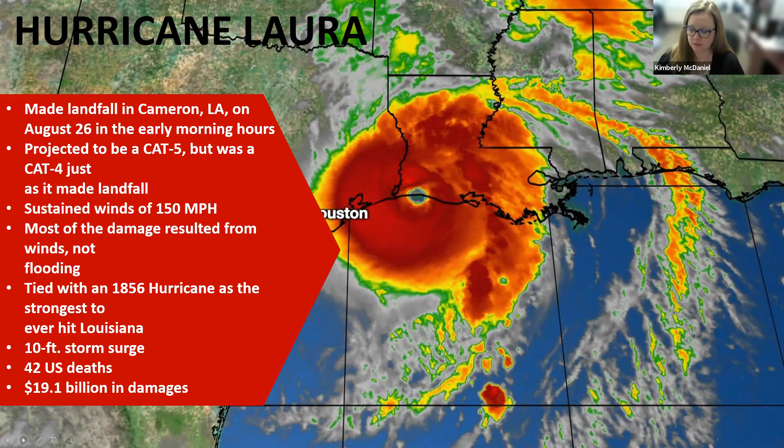We sat here in Baton Rouge watching the damage, watching the news, watching this happen—really not much that we could do. As the hurricane moved through and local officials started to assess damages, the entire parish of Calcasieu Parish and Cameron Parish, you can see on the map, everything in that really dark red, were 100% without power. A big majority of the state did not have power at all, and when you lose power, you lose everything—signals, sewer and water systems, all sorts of things go offline. So the damages were just really, really bad, a lot of it attributed to wind and flying debris.

So they ordered an evacuation prior to the hurricane. People listened, people got out of those areas. We have a strong relationship at Fenstermaker with Calcasieu Parish, we do a lot of work with the parish. On that following Monday, the hurricane had passed through Wednesday night into Thursday morning.

They started assessing damages over the weekend, started to allow people in on that Saturday, although there was a strict curfew in place, to come back and assess their personal damage and situations, but you had to leave before the curfew started. They weren't allowing people to stay in the parish overnight unless you had special permission because of your essential job. That's when they started to realize they had traffic issues, not only getting in and out of the parish, but within the parish as well.

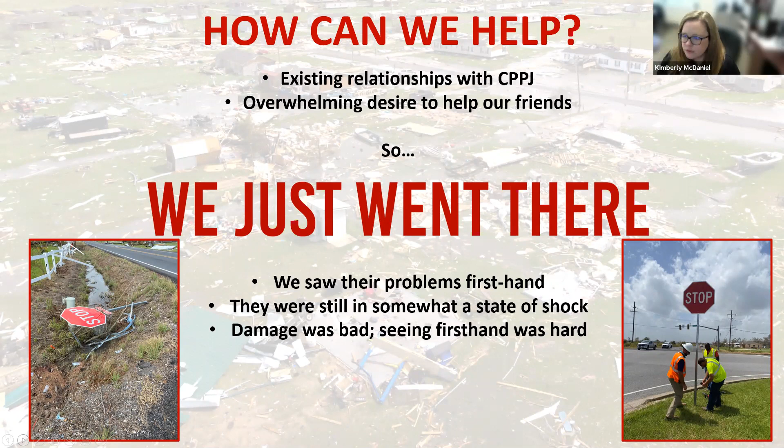We sat and we listened and realized they were still really in pretty much a state of shock. They were having a difficult time even figuring out where to start. So we sat down with them, tried to understand the problems they had. What were their biggest concerns? One of their biggest concerns was crashes.

So we said, okay, but your signals aren't working - have you put stop signs up? And they hadn't. So we said, look, do you have some stop signs? Let's load them up. We loaded them into a truck and rode around with them, helped them put stop signs up at those intersections, and just tried to do what we could - kind of boots on the ground. What can we do to help you?

Then we sat down with them after we did that and really just started to sort through their problems and help them figure out a path to recovery - what do you need to do to move on from here if this is a big concern of yours?

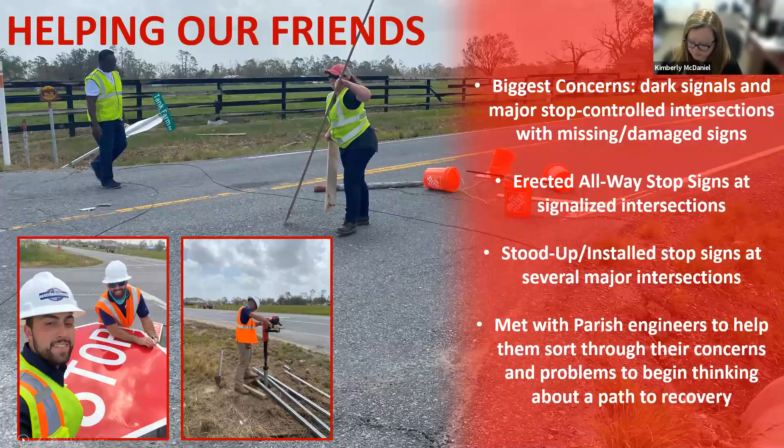So we worked with them, said, this is what you have, what information do you have available? It was pretty limited, but they knew they needed to restore traffic control on their parish roadway system. So they put together an emergency RFQ with a really short turnaround time, maybe 5 or 7 days. We submitted along with several other firms, and ultimately our proposed assessment and repair plan was the one they selected. So we knew immediately it was time to get to work and we needed to do it really quickly.

So we turned around that plan. Diane's on the line here - I think some of you may know Diane Hammond, she works with us. I think we didn't sleep for a week trying to put this plan together and figure out how to get out there and help them.

So the parish already had an existing Cartegraph database of most of their sign locations. That gave us a starting point to say, okay, we kind of have an idea of what should be out there. They had about 14,000 signs on their system that we needed to locate, assess, maybe repair or replace. We didn't know yet. Crashes were still occurring on a pretty regular basis, so they were pretty stressed about getting the fix in as quickly as possible.

Like I said earlier, most of the parish employees were faced with their own problems at home, so we basically just kind of took this problem from them and owned it. Residents were still displaced, there was still no power, no cell service, water and sewer was very limited, even gasoline - you had to fill up your tank about 30 to 40 miles before you got into that area because you were not going to get gas when you got there. So every time we went over there, we brought in food, we brought water, we brought any supplies that we could help with because they were in such short supply.

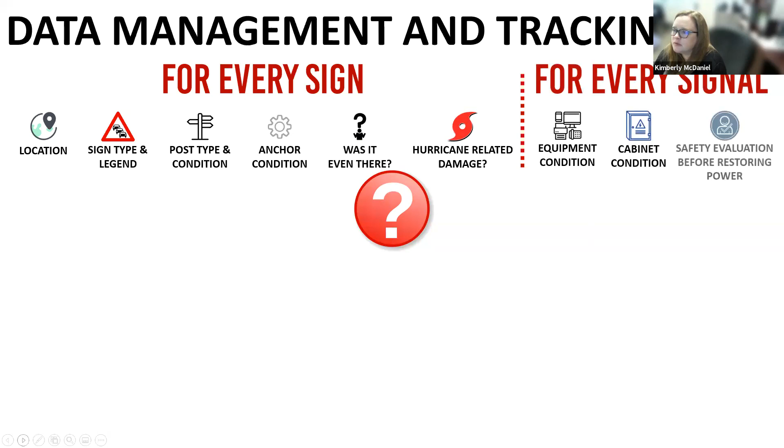So we had to set up some sort of data management and tracking system. We were assessing signs and we were assessing signals - any traffic control device on their system. The big question was, how do we do this for 14,000 signs, 3 signals spread across over 1,000 square miles of the parish? That was a huge undertaking.

So we sat down with a couple of our engineers and just really started brainstorming what's the best way to tackle this. That's a lot of data to manage, and to manage in a very quick fashion in an area that doesn't have much power, doesn't have much cell service. You're encountering all sorts of different things when you get out there.

So for every sign, we needed to know where it was located, what the sign type was and the legend on the sign. We needed to know the post type and condition. We needed to know the anchor condition. And really, was the sign even there?

In a lot of cases, we got to a place that should have had a sign and there was nothing to be found. And then we found signs that should have been in a completely different location that the wind had just picked up and basically relocated to somewhere else.

And then one of the things we had to assess was, is it really hurricane damage? Some of the signs needed to be replaced, but one of the funny things that we ran into was there were a lot of signs with bullet holes in them. I don't think the hurricane shot the sign up. So we had to make sure that we were delineating hurricane damage from other damage on those repairs and replacement as well.

And then for the signals, we needed to assess the equipment condition. We needed to know what the cabinet looked like - was it still in good shape? And frankly, we needed a safety evaluation because before power was going to be restored, we needed to make sure that it was going to be safe to restore that power.

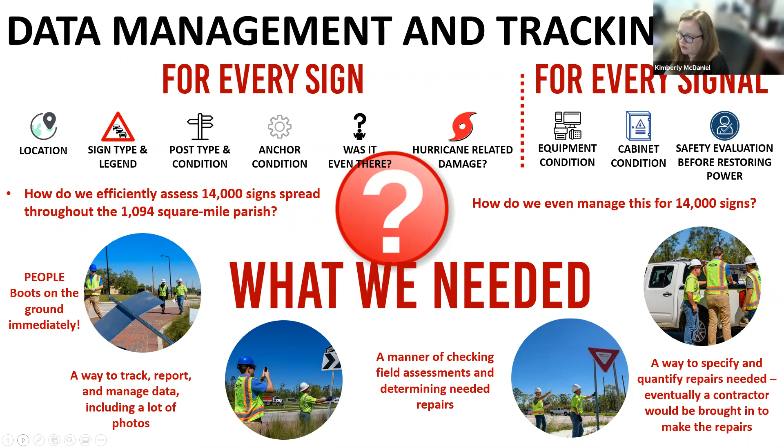So one of our engineers developed a mobile cell phone based application to do that, and I'll show some examples of that in just a few minutes.

So we set up a priority system because tackling 14,000 signs at one time was huge - we needed to break it into pieces. So we set up a priority 1 and a priority 2 system, and then subdivided priority 1 into an A and a B, so that we could get to the locations, assess and repair the locations that were most critical first. So what we did was priority 1A included all of the stop, yield, and warning signs on the parish's master transportation plan.

That included everything on major, minor, and arterial collectors. That was priority, so we tackled those first, doing the inspection and assessment on those. Priority 1B was the rest of the warning signs throughout the parish, and then priority 2 is where we got into the remaining stop and yield signs on local streets.

It's a relatively rural parish when you get outside the city of Lake Charles, and there were a lot of signs within small subdivisions and neighborhoods. We didn't feel those were priority because when you're leaving a neighborhood, you know to stop and wait before entering the main highway. That's not where the critical locations were, so we put those in the last priority bucket.

So we developed an app, like I mentioned. This is completely attributable to one of our younger engineers. He amazed me, developed it overnight, called me the next day and said, hey, I think I have a solution. We had to do some tweaking to it, but it was absolutely perfect.

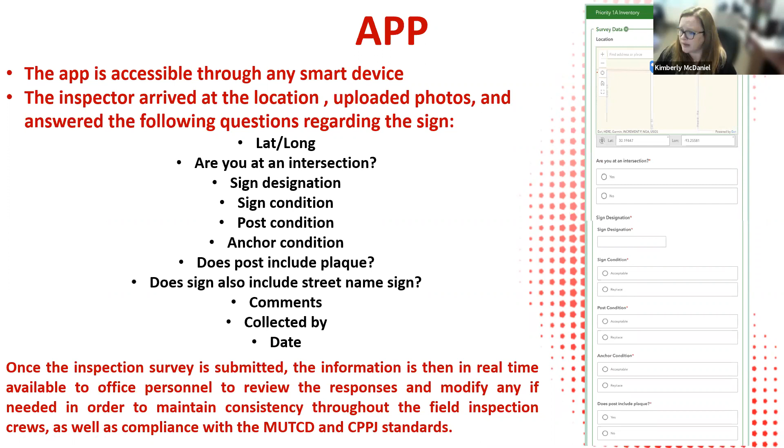Once they did the survey in the field and it was submitted, we could access it from the office immediately in real time. So we had a crew of people in the office doing reviews right alongside the crew of people in the field doing the inspection. We had people working on this from Lake Charles to New Orleans for several weeks at a time.

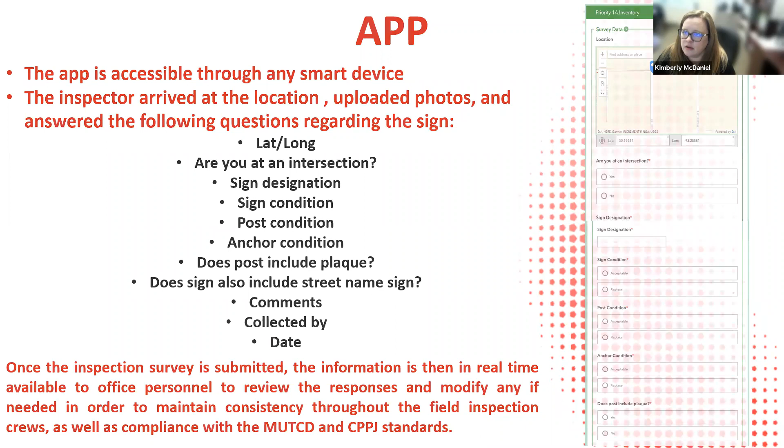It was great for them because they were giving daily updates, press conferences, and Facebook Live events, so they could inform people who were still under a don't-come-home order, still under an evacuation order. People were dying for information, and this gave them real-time information to share with residents displaced and not back home yet, so they could understand what progress was being made. It was great for parish officials to show real progress, and it helped all of us know if we were making progress. It was very visual, so that was really helpful.

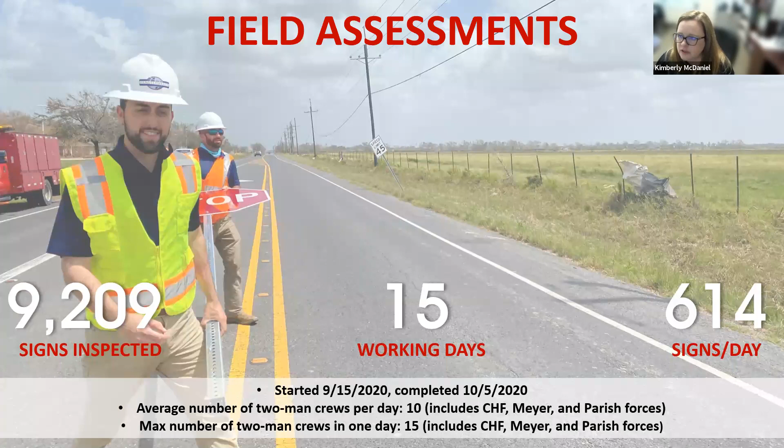In the course of 15 days, we assessed almost 10,000 signs. We were averaging about 614 signs per day, assessing the location, the condition, and uploading photographs so we could make decisions in the office.

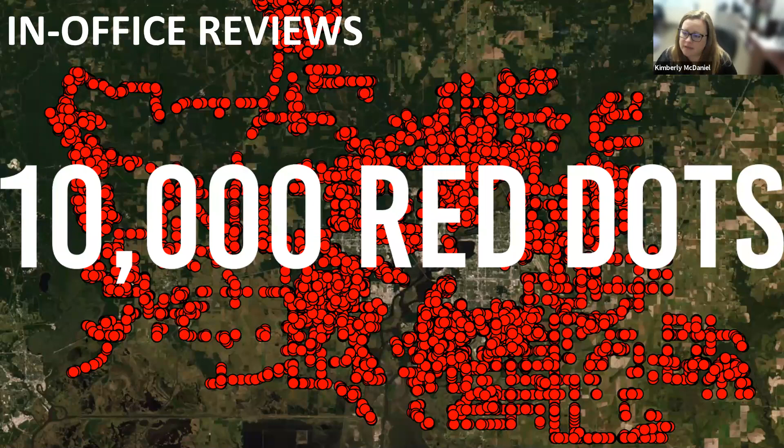So our in-office reviews - this is where the 10,000 red dots came in. We had, at one point, up to 8 or 9 people in the office spending all day clicking red dots on the computer screen to make assessment decisions. We used that dashboard I showed earlier - each dot, once clicked, would bring up reports. The upper right-hand page of the screen was the reported information the field inspector uploaded, as well as the photograph.

We had engineers in the office double-checking things like whether they clicked the right sign legend or sign type, reviewing and confirming decisions made in the field about what needed to be replaced or repaired - could we keep the post, could we keep part of the sign or not.

So then the next thing was we had to get a contractor on board, and quickly. Within just a couple of weeks of starting the assessments, we also advertised for a contractor. We really had no idea on quantities - it was completely estimated. We had to think of it almost as a design-build project, because we wanted the contractor on board and ready well before we finished all the assessments.

Traffic Solutions was the low bidder on the project. We had a pre-bid meeting to explain the uncertainty given the quantities and the work, and we also explained the working conditions, which were obviously less than ideal - the area still had very little power restored at that point.

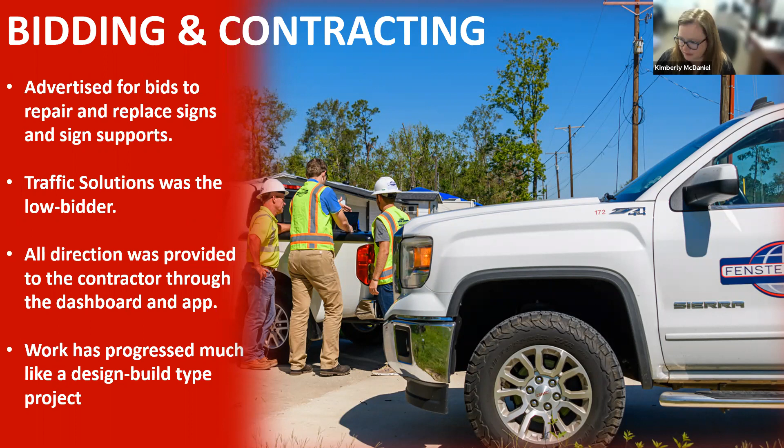And then Hurricane Delta hit. Literally 2 days after we had finished all of our assessments in the field, Hurricane Delta made landfall in the exact same area. This storm brought a lot less wind, but a lot more water.

So the damages were a little bit different, but then we were faced with the question of how do we track Delta damage that wasn't Laura damage, because when you're submitting for FEMA reimbursements you have to segregate the two as best you can. So we had to go back into the database and create yet another module of the app. Luckily we had finished the Laura assessments, so when they got to a sign that was damaged that maybe hadn't been damaged on the Laura assessments, we knew the damage could be attributable to Hurricane Delta.

So not only had this area been hit once, but it was a 1-2 punch. They got hit again, and now we're doing essentially simultaneous double assessments.

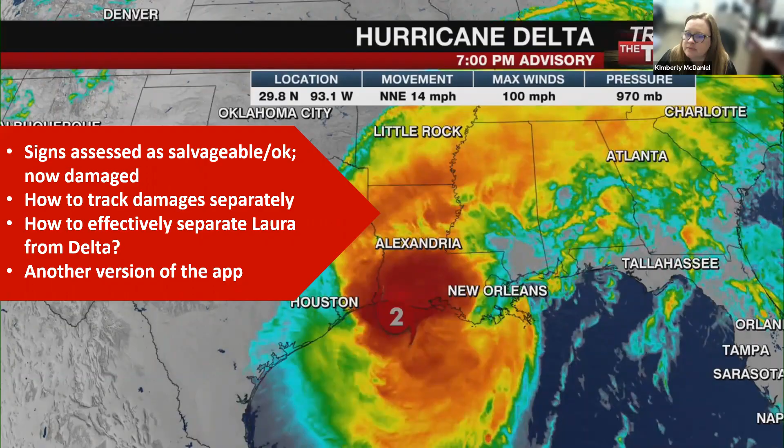Once the contractor got on the ground to start doing his work, we needed an inspector to follow those contractors around to make sure that the signs were installed correctly in the right place, and also that quantities were being tracked. Again, another module of the app was created so that we could document the repairs and track and verify quantities, take photographs and things like that. So documentation was just a huge part of this whole project.

And at the same time, we had the inspectors noting any damage that they noticed when they got to those locations that had not been previously reported, so that we could attribute them to Hurricane Delta damage and segregate that into a separate repair and replacement project.

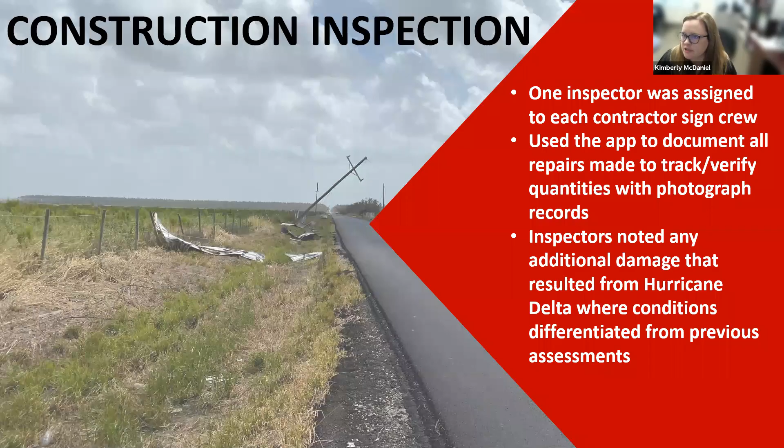And then we started noticing that there was still some damage out there that maybe hadn't been noticed yet. So we set up yet another module within the app that allowed any employee - anybody who worked for the parish, who worked for the contractor, who worked for us - to report other damages they were noticing when they were out in the field. We call this our punch list of things that needed to be taken care of. The parish actually sent their crews out to take care of these so we could keep it separate from the other contracts. So far to date, there were 26 reports of other damages that needed to be corrected.

And then there were the signal repairs. As they started to get close to getting power restored, we started looking at how to repair those signals. I mentioned earlier that Jeff Smith came in as an expert to assist us with the damages and the assessments to the signal systems, the cabinets, the controllers, the wiring, the signs, everything. We had one signal that had some pretty significant foundation damage on one of the mast arm foundations, so that had to be corrected.

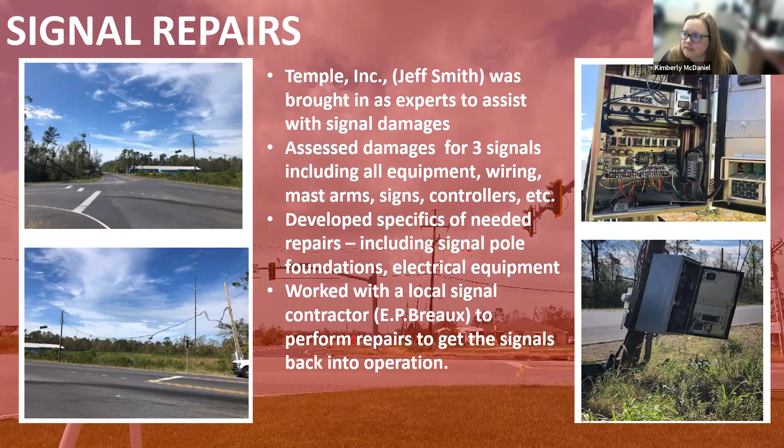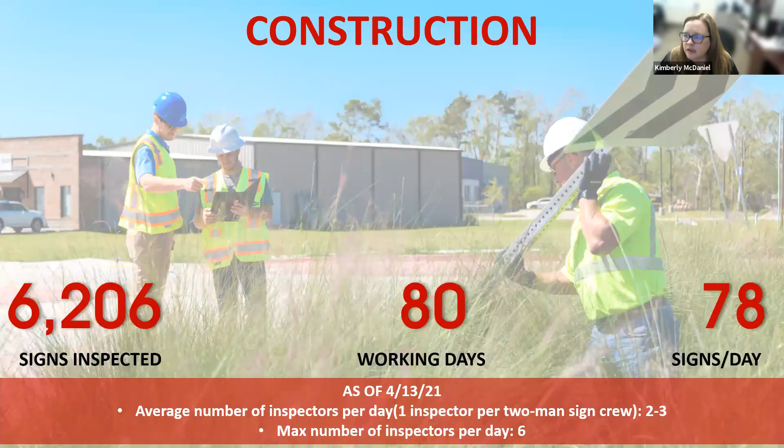So work continues, we're almost done - we're seeing the light at the end of the tunnel now for the replacement. We began August 26th when Hurricane Laura made landfall. As of December 22nd, even with Delta coming in and putting a kink in the system, all priority 1 signs had been repaired and replaced. So the critical signs on the parish's system were all repaired before the end of the year. We were really proud of that milestone.

Here we are in April. All priority 2 signs we believe will be repaired or replaced by the end of this month. We have approximately 600 signs that remain. The parish did end up entering into a separate contract with a signing contractor, who ended up being the same contractor to do the Delta damages. So as soon as the Laura damages are completed this month, an NTP will be issued to take care of the additional Delta damages.

They're doing the repairs overall at a completed rate of 35 signs per day per crew, so that's a pretty significant number of signs being replaced. We're averaging about 4 crews per day at about 140 signs being repaired and replaced per day.

So that's kind of where we are with that. I don't know, Jody, if you want to take any questions at this point or hold until the end.

We do have a couple of questions. I think we've got time for maybe one or two. So the ArcGIS map that you showed, was that public facing or was that really for your internal teams?

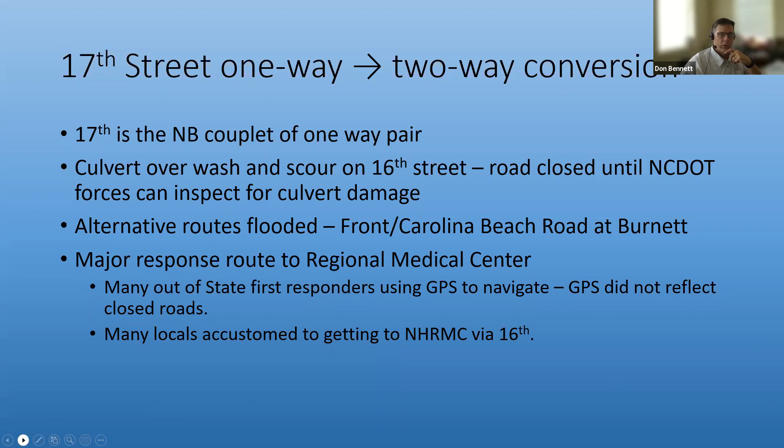Fortunately, these were 3-lane roads on both. So we used a one-way, the 17th Street, we used a one-way couplet.

If you'll notice, a lot of this stuff is hand sketched in. One of the things we discovered at our operations center was that our CAD license for AutoCAD resided on the server downtown, and we didn't have connectivity to that. So we had to connect the plotter to the local computer, get via a 4G download, get some drivers, and we were able to plot out aerials.

Then it was time to break out the ink pens and markers and actually come up with some plans. In this case, if you were coming down Greenfield Street, you had to turn left onto a 3-lane section, go the wrong way on the one-way couplet, and then make a right turn to return to the traffic signal.

This allowed local first responders to have approximately 15-20 minutes trimmed off on the alternate route to the hospital. And again, this is the local trauma center.

So for execution, we had an amalgamation of a local traffic control contractor, secured traffic control to provide much of our hardware. Then we had some VMS boards with the city of Wilmington. This was a pre-approved purchase order contract we had in place, so all I had to do was call him and say, I need X number of cones and I need them here. We used the center lane on that 3-lane section as a buffer between the directions.

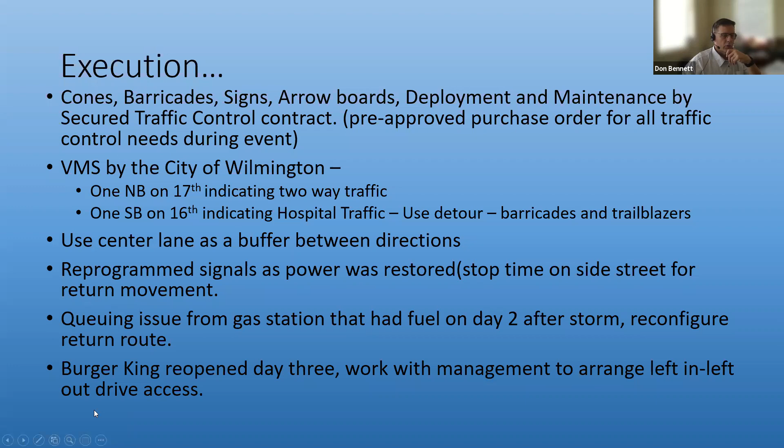And then the Burger King that was on this, is a Burger King right here. We worked with them to have their employees help us with a left in, left out pattern there, which helped the return path quite a bit.

Now, end of about day 2, we're all getting a little bit draggled here. I'm focusing on doing assessment with the remaining crews that I have. One of our traffic officers, who we have a very good working relationship with in city traffic...

He calls me up and says, hey, I live in a neighborhood with a roundabout, and we pulled some stuff out of our DWI checkpoint trailer, and we've set up a roundabout at one of the major intersections.

When you look at the observations of dark traffic signals, which by North Carolina statute are an all-way stop, on approaches with 4 or 5 lanes on both directions, or 2 to 3-lane approaches on all approaches to the traffic signals, they do not work well as all-way stops. The first car in line takes off and everybody else just plays follow the leader.

Unless there's an officer there, compliance is spotty even if your main line stops at all. And if he is there, he'll be expected to direct traffic, which again, what we're looking at is we can't get resources and people into town to provide this service. So the officer is exposed to both weather and traffic.

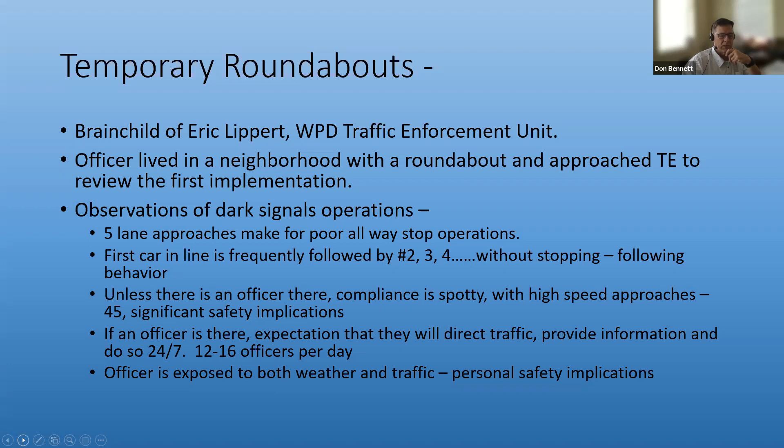There's personnel exposure, and they're expected to provide information. Hey, where can I find bread, milk, eggs, gas? Where can I find these things that I need from the people inside that perimeter?

So the officer actually used his crash software to provide a design, and this is what they came up with, and that was the plan. They executed it, and they had to make some adjustments, but they mainly called us for, hey, can you get us some signs out here to tell people that this is operating as a roundabout?

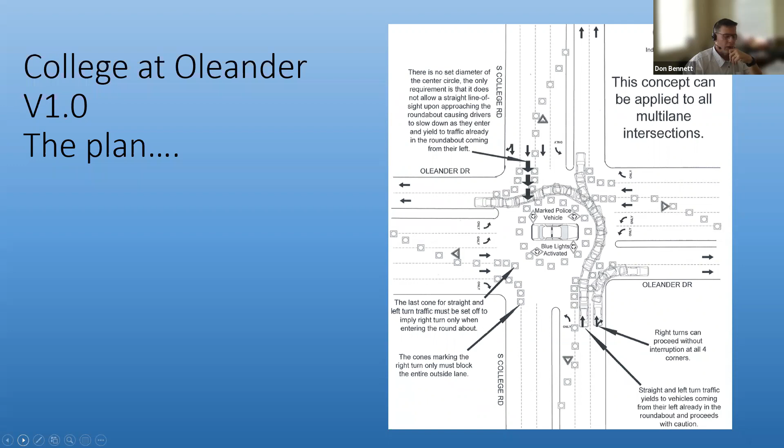The good news is this reduced the officer load from approximately 12 to 16 for a 24-hour shift down to 2 or 3, and they got to sit in their car with the blue lights on. So the traffic was allowed to flow around. People weren't stopping to ask the officer questions, and he's protected from the elements and the traffic inside the car.

So the lessons we learned: increase the tapers. People do not like to move over that fast in that short of a time. Even though there was a night curfew, the light towers were needed because you've got an officer sitting out there in a dark intersection, and even though he's got his blue lights on, it still presents a significant safety exposure for him. And we needed a trailer with a playbook and the necessary materials to implement these things.

Wilmington is very hurricane prone. Bonnie, Floyd, Bertha, Fran, Florence. It seems like the F storm always knocked us out.

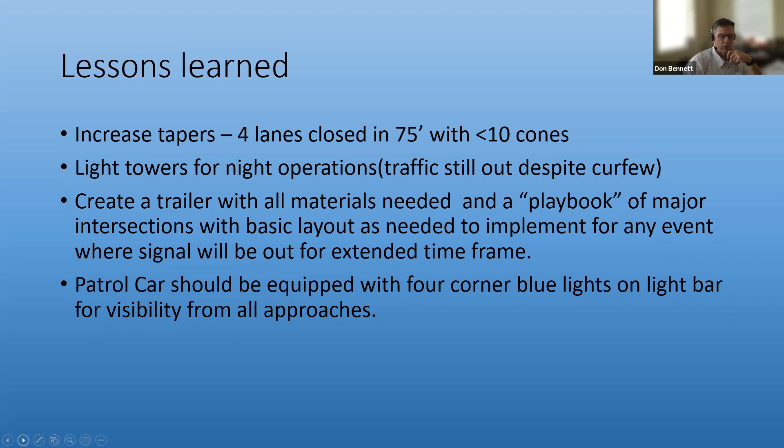So again, we have access to a plotter. At this point, we've gotten a license to AutoCAD, so we start laying things out so we can give our contractors some idea of what they're going to be putting out there. The contractor's purpose is just to get the materials out there.

I physically and personally had to go out and adjust the location of all the cones and get it set up so it was operating the way I intended for the design. So the design became a starting point.

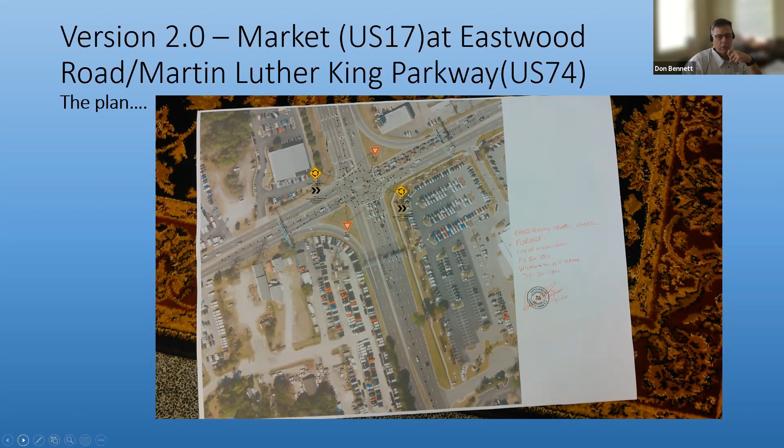So again, secured traffic control. Now you can start to see we've actually got a formal center circle. It's not exactly circular. We found out that a roundabout could be constructed with about 300 to 400 cones, a 30-foot piece of string and a can of spray paint, 8 sign stands and 8 signs.

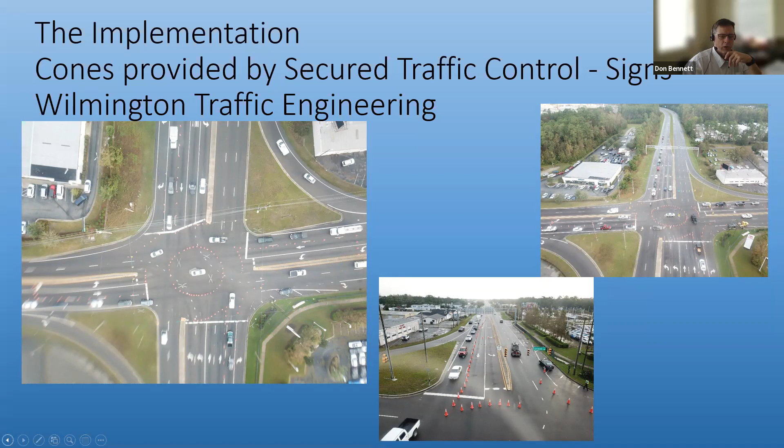So you can see we're starting to develop some tapers here. We're moving them to the outside lane. We've got a little larger circulating circle, starting to look more like a formal roundabout.

So again, Wrightsville Beach was kind enough to give us some aerial shots. We can see trucks with trailers going through, single units are going through, and behind it we got a truck with a Bobcat on it.

Those things worked well, but then you run into different situations. What we found out is that we can get a roundabout to go in any intersection that has about 110-foot square in the middle.

So the circulating roadway, we had to flare that out to accommodate the trucks and minimize the number of times that the officer had to get out and reset the cones.

Fortunately, because we had used that spray paint and the string, the officer always had a reference point for where to put the cone back. And the cones make for a ready truck apron—they can run over it. You just got to make sure your sign stands are not inside that informal truck apron.

And the entry lanes required flare because we were stretching those flares out and we were getting some approach speeds that were a little disconcerting.

So then we go to version 3.0. We had to simplify the plans now. We're starting to run out of people and resources. Everybody's getting tired.

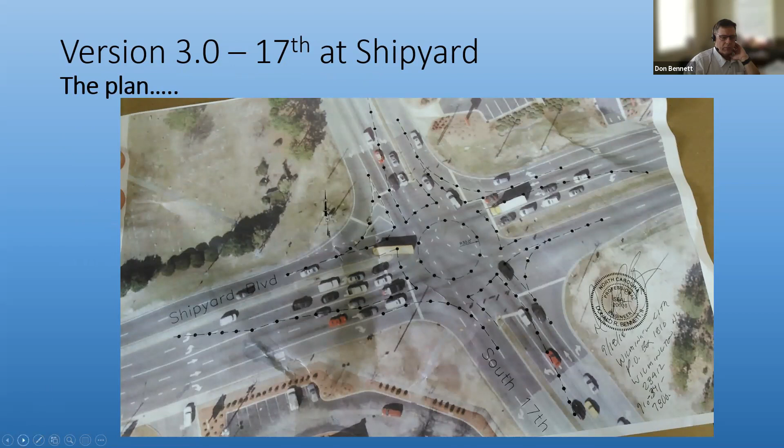So now we start getting up. You can start to see some entry flare on the approaches. The circle's getting a little more defined.

If you'll notice, this traffic signal head is actually facing the wrong direction, and there are no westbound approach indications. They're all laying over here by the cabinet, piled up on the span. So even if we had power, we could not have restored that intersection.

But you can start to see the signs here on the approach. They're visible. They indicate circulating roadway and that it is under roundabout control.

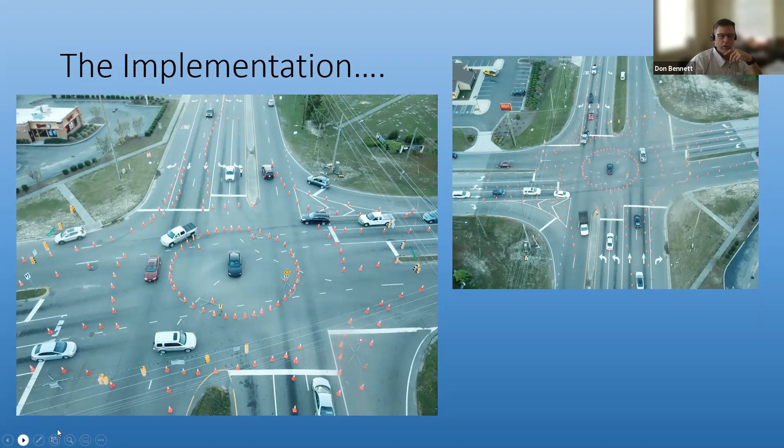We got our overhead video again. As you can see, we actually have a bicyclist going in here. So yes, your portable roundabouts and temporary roundabouts can actually operate with multimodal accommodations.

But we're starting to see some better circulating speeds, and a little more capacity come out of them. So the lessons learned: where the left turn bays start to flare out, that's where you want to start your tapers, primarily because you don't need people starting to move over in those left turn lanes and then realizing they got to come back to the right again.

Installing reverse curve on the entry, we need to break that speed. The other thing is that when people are approaching the roundabout, we actually found out we don't want them to see a clear, straight path through. At night, it was just a field of pixelated cone reflectors, but it pretty much forced oncoming traffic to slow down and evaluate what was going on.

You got to break the pavement markings. We were seeing cones knocked over where people were trying to stay in the lane marking, but couldn't quite do it. So at that point we're deciding, let's go ahead and get them completely off the lane markings and get them to follow the direction they're being given by both the cones and the signs.

If you have dual lanes on the outside and a right turn lane on the approach, you can, in fact, get some slip lanes in there. You just got to extend your exiting traffic a little bit, keep your merge on exit from becoming an issue.

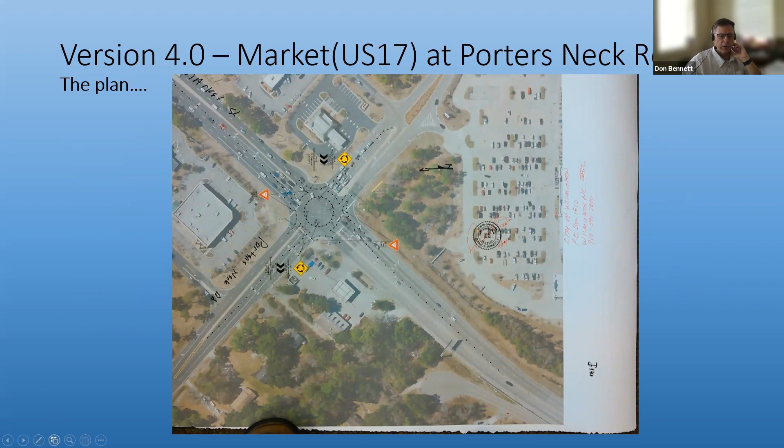Unfortunately, at this time, Wrightsville Beach did not have the ability to get out there. But at the time this came in, the request was made by State Highway Patrol. This is the first location outside of Wilmington. So we worked with the North Carolina DOT Incident Response or Incident Management Center, worked through their IC command, got permission to implement outside the city of Wilmington.

We incorporated all the full lanes. At this point, US 17 coming in from Porters Neck is the only road into Wilmington. All your relief services and all your citizens returning are coming back. More cones, and we really observed the capacity limitations on a single lane roundabout.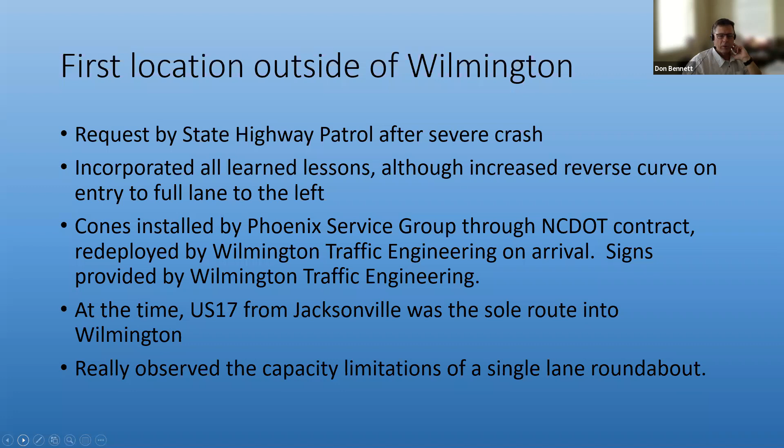But State Highway Patrol kept 2 officers there. With 2 officers there, they were actually able to shut off the 3 approaches that were not US 17 southbound by just moving some cones, telling people to wait. And then the officer would get on that southbound approach and he would just wave people into the roundabout, let them go wherever they needed to go and flush out that approach.

So the lessons learned from the single lane roundabout: they have a capacity, and it's about 60% based upon the very limited data we had from the overhead video. Although they do have a limited capacity, they work a lot better than 5-lane approaches to all-way stops.

And if something did go wrong, it was resetting some cones, maybe a fender bender, no injuries. That's what we see with roundabouts in general. There were no crashes reported. We did go back and look at the collision reports at each of the locations where those had been put in, and even with version 1.0, no collisions during that time.

We found out that we had a greater capacity in the areas where people are accustomed to roundabouts. In that Porter's Neck location, there was a roundabout east of that site, about 1.5 miles, and the locals were used to using it. And Southern drivers, I will say this, bless their heart, courtesy kills capacity.

It takes a team when this happens, and a lot of these relationships were in place prior to the event. We had our police department, Wilmington Traffic Engineering, Streets and Traffic Division of our Public Services Group. We had a contractor and the DOT's contractor for traffic control devices, the Incident Command in Division 3, and of course Kittelson and Associates coming in—local guy Bastian Schroeder, really good with roundabout modeling and research—and he was able to dissect some of that video and come up with some of what we thought were reasonable capacity constraints. And that would be the end if we have questions.

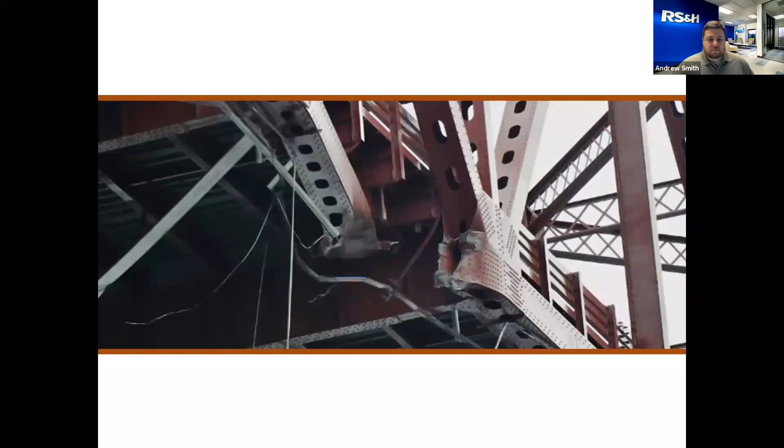Immediately following the incident, a lot of 911 calls came in from concerned people. It was a 51,000 plus ton vessel, and it had severed one of the two lower chords of the truss bridge.

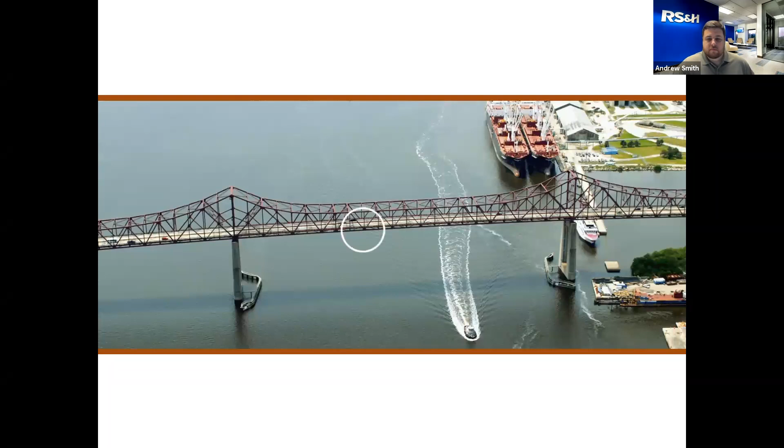At that point I'm thinking, how is the bridge still standing? To my knowledge, a bridge has never been hit like this in the superstructure, pretty much in the center of the main span. Most people in our industry, in construction and engineering, seeing that kind of damage, immediately recognized this was a serious problem.

We had people, our people, FDOT people and our consultants, who risked life and limb to go out on the bridge. I remember on the way out there, they mentioned we should probably go three at a time, just for safety.

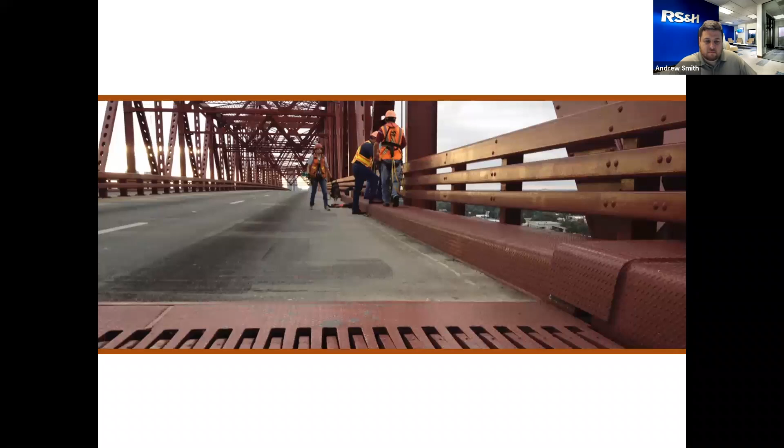It was very eerie on that bridge. Who's going over the side of that bridge in this wind, in this rain? We were scared. We didn't know what to expect.

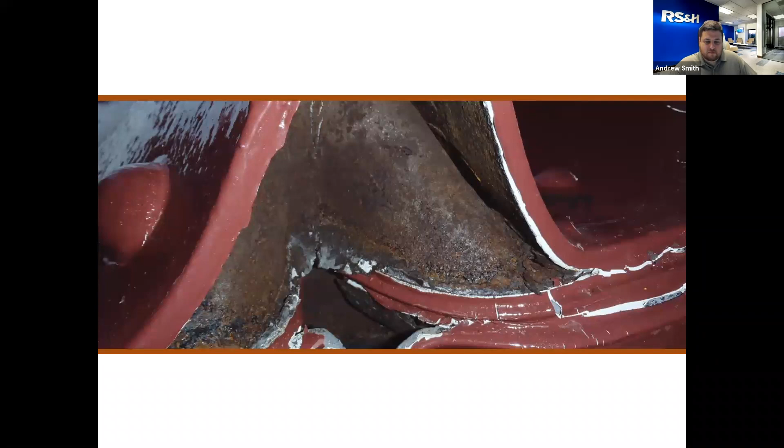I saw what it was, that the lower chord, the tension chord, was just sliced. It was just gone, disconnected. When you see the pictures, the major chord on the bridge that's carrying the load is severed. The magnitude of the destruction to the steel structure is the worst I've ever seen. It's as bad as it gets.

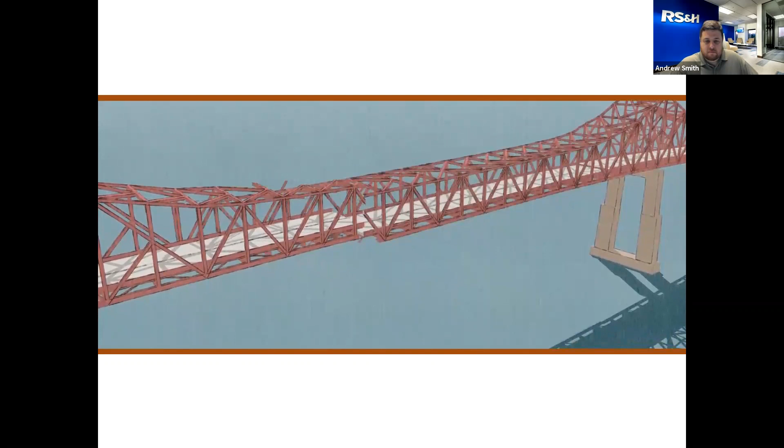It's one of those situations where collapse was imminent. You can ask, well, how close to being a catastrophic event was it? It was within a few feet.

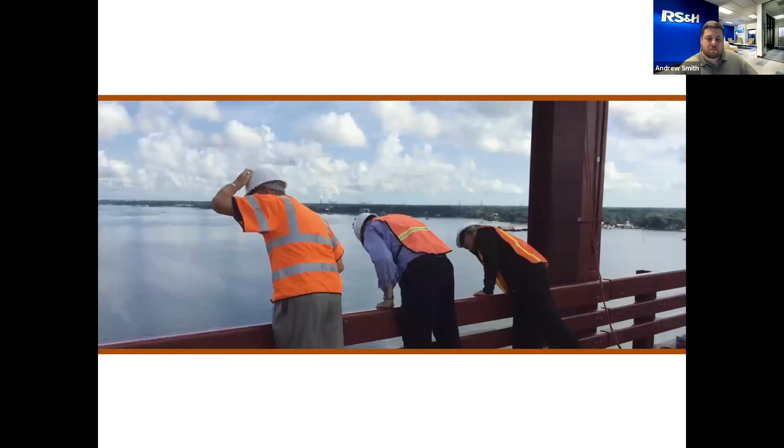Our drive was to get the bridge open quickly, but you also have to balance the structural integrity and the safety of the bridge. How fast could we get the bridge back open safely and know that we had a quality job at the same time? How are you going to do this? What's it going to take? How are you going to move the steel? How are you going to anchor it? Can the deck take the load?

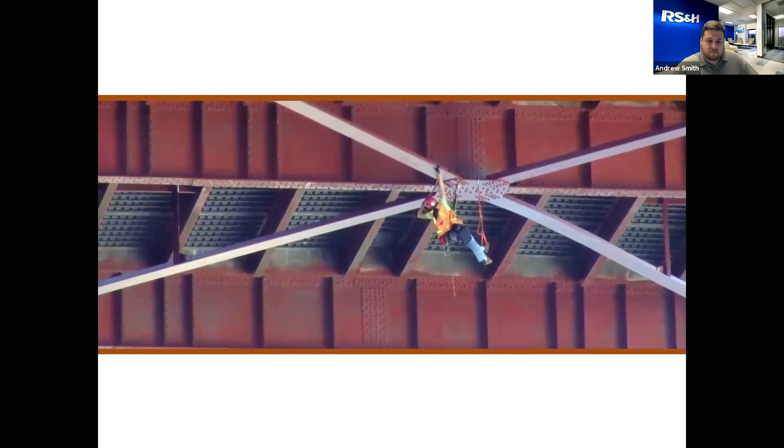There's not a textbook and not a computer program you can open up and say, how do we repair the Mathews Bridge? When you get vertical and horizontal displacement, you have to pull that back into location. Well, the problem is, what do you anchor that to? We can't hang a hook up in the cloud.

As Will Watts told us on the bridge, to come back to the office and come up with a plan for a plan. Some of these folks spent the whole three days in the office, 24/7. They just ate and slept this project. 76 hours after the initial impact, we handed over bid documents to proposed bidders.

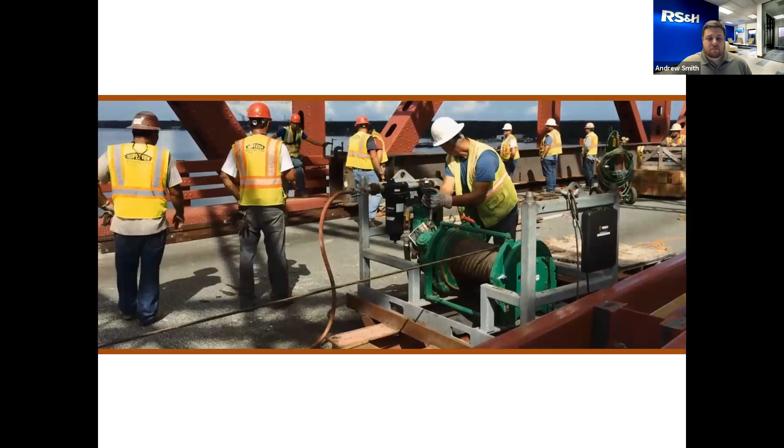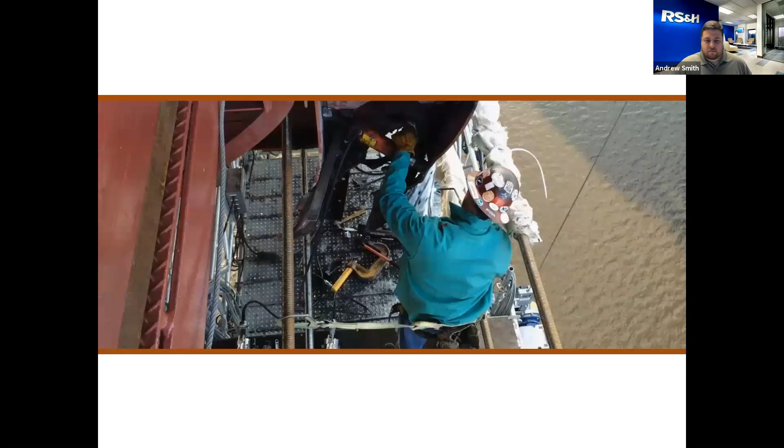At the end of the day, we set up for 24/7 operations on the bridge. We had tents and folks on site around the clock. Problems would get resolved before we knew there were problems. The shop drawing process went so fast that things were changing on a daily basis, on an hourly basis. It was seamless. Everybody was working together, everybody was in it for the bridge.

We were able to open the bridge at 5:30 a.m., 28 days into the contract, 34 days after the initial impact. Cutting that from 40 days to 28 days is miraculous. And you run the percentages on that, and I'll take those all day long.

The reason we were able to do that is because of our excellent relationships and collaboration with our industry partners. The fact that it took close to 200 people by hand to fix this bridge is an amazing thing.

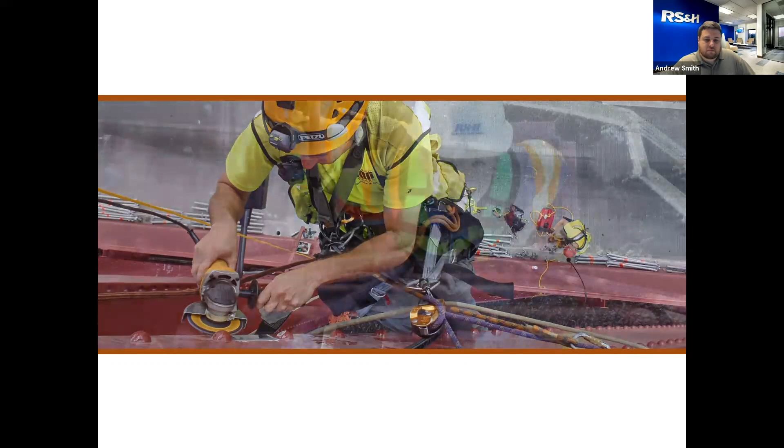It's the people behind the project that really dug in and got this job done. There was some tremendously amazing engineering done, and a lot of hard work by the departments, the contractors, the inspectors. Everyone worked extremely hard for this project, all to bring it together for the people of Jacksonville, who will never know any of their names.

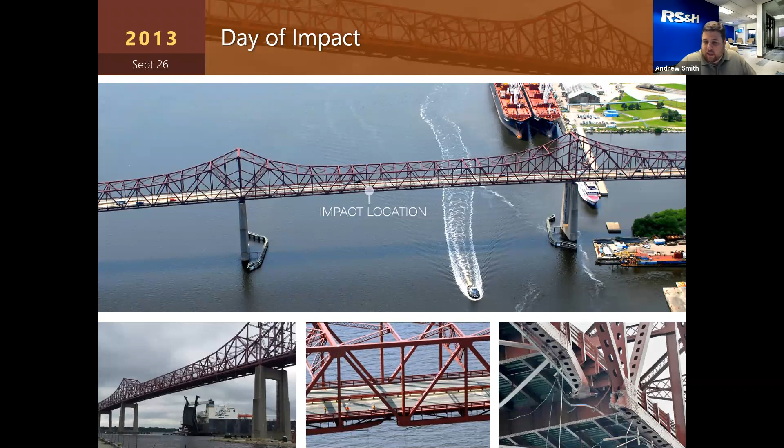All right, so we're on the day of the impact, and we're showing the location where the vessel hit, and a couple of the pictures that we see. First information we've got is that they've severed the chord.

So we're 150 feet up in the air. The impact's below deck. It's not even an easy place to get to, you can't get to it from the bottom. So we have to bring out inspectors using rope climbing gear to hang over the side and inspect the damage and start getting information so we can figure out what's going on.

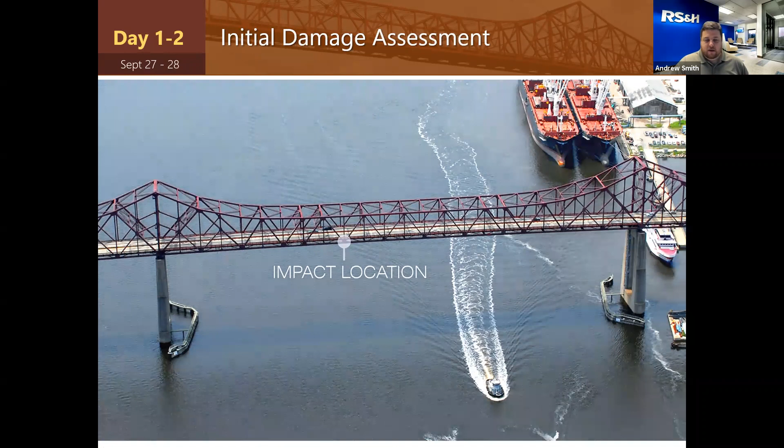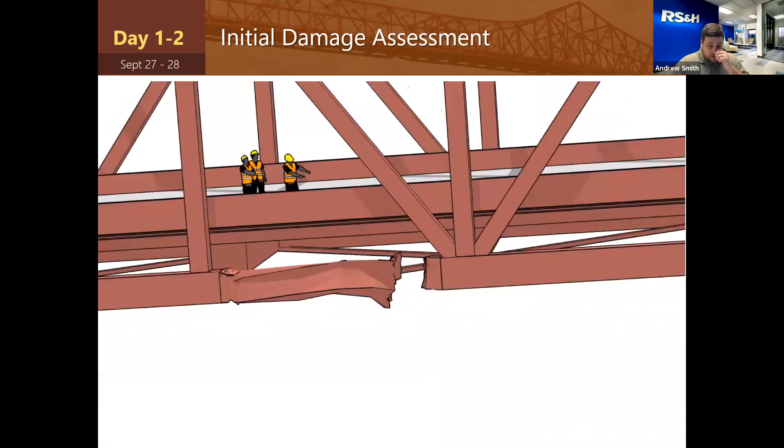So the findings from the inspection are: at the site of the impact, the bottom chord has been severed, and the gusset plate that connects it has been damaged. Underneath, the laterals that add stability to the structure have shifted and failed. We've also seen the floor beams have moved as they were trying to redistribute the load. The bottom chord is a fracture critical member, so losing that could potentially lose the structure. We know we've got a major issue here.

So on the first weekend, we had to develop a plan for the repair, and we were able to develop the plan, designs, drawings, and scopes in that first 76 hours so that we could start working towards a solution.

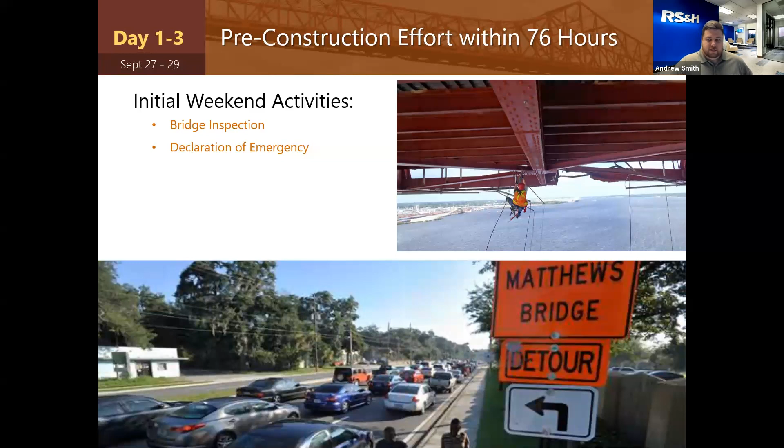So we've done the inspection, they've declared the emergency, and now we're trying to get all our plans pulled together so the contractor will know what they've got to do to repair the bridge. We pulled the construction package together, and coordinated with the contractors. They had 5 that they discussed it with to get bids turned in.

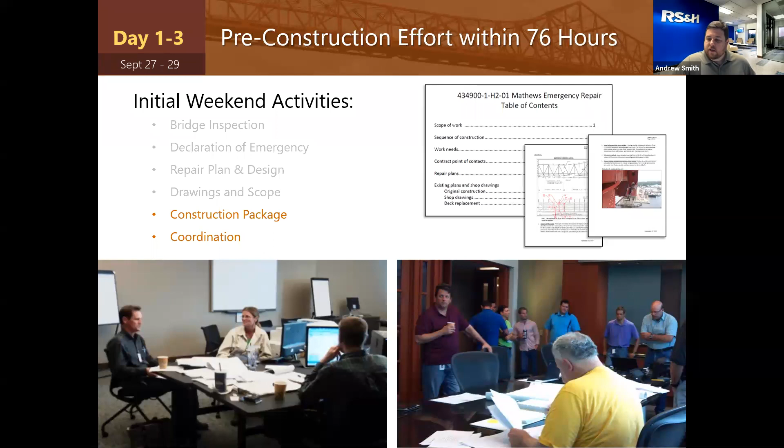So now let's talk about the repair plan. Three major items: a strong back in case we were to have an issue with the pins supporting the span, a temporary chord to restore the capacity of the truss, and then reinstall the permanent chord to fix the damage.

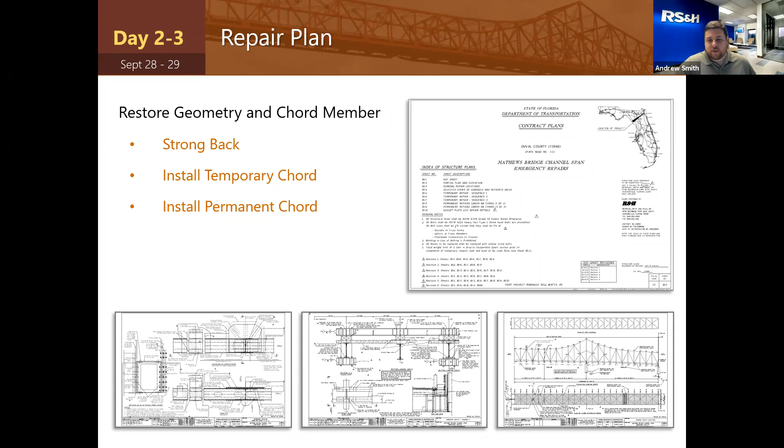So here you can kind of see a graphic showing the repair plan. First, we're putting in the strong back in case these pins, shown with the black circles, were to fail. We didn't see any damage, but we weren't sure, and that would drop the entire span. So that was a very important item first.

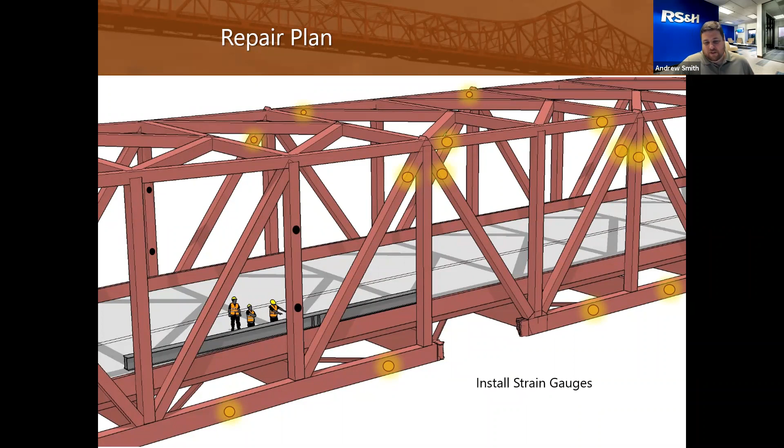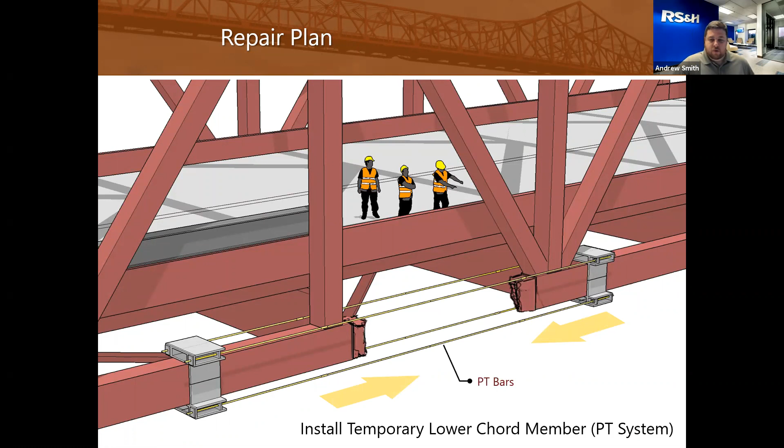Once we get that in, we get some of the damaged material out of the way so we can install the temporary, put strain gauges so we can watch what the structure is doing as we start to pull it. Then we'll install the temporary tie. These are some brackets that support the PT bars. Then we'll put the bars in and stress them, and that restores the force in the chord member.

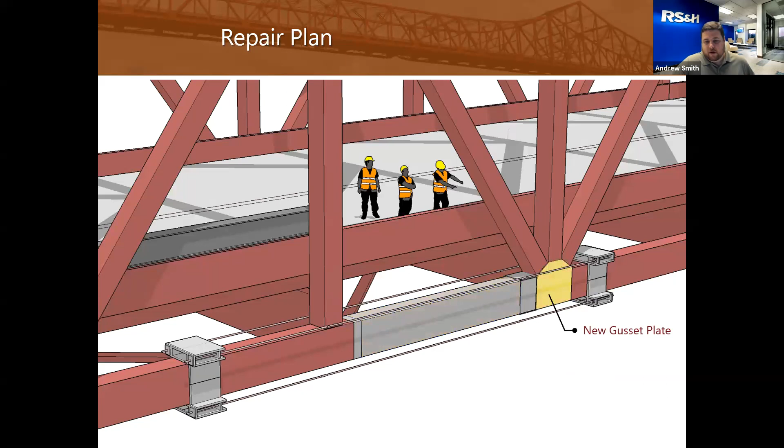Once that's in, we can get in and repair some of that local damage and then reinstall the new stub. This was actually a contractor item that Steve will get into. Then we'll install the new chord member and repair the truss. Then we can remove the temporary, the PT bars, after we fix it.

All right, so now that we've been able to get out there and inspect the damage and come up with a plan, we've got to implement it, right? We actually got to do it. So we developed a construction package, a contract package that basically consisted of a scope of services, a construction sequence, some very basic repair plans, and then a schedule. The schedule was not to exceed 40 days.

I think there was a $50,000 bonus for every day they finished early, and a $50,000 hit for any day they finished late. 5 potential contractors were invited to come inspect the damage and bid on it. They were hand-selected by FDOT because of their local experience and their prowess with this type of structure. The winning contractor was Superior Construction, and their bid was basically 1.1 million.

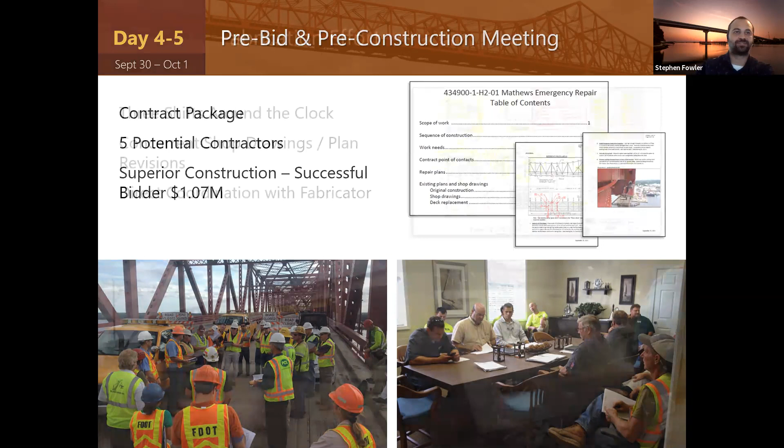As soon as we had our contractor on board, we got moving. The fabrication effort started immediately. That evening, the fabricator, based down in Tampa a few hours away, worked around the clock. Their team worked in 3 separate shifts, and so did we.

We were doing concurrent shop drawing reviews and plan revisions. As they came up with ideas to save money, or asked questions like, hey, we've got this thing lying around in the yard, can we use this instead so we don't have to order something, we were there on the phone with them sometimes 2, 3 o'clock in the morning saying yes, you can do this, or no, you can't, but how about something else?

Once the strong back has been constructed, they ship it out to the site. One thing we did for the design of the strong back system was avoid anything too prescriptive, because we wanted the fabricator and contractor to have enough flexibility to choose whatever met our criteria. We gave them very basic details, with the major criteria being a weight limit of 5 tons and a minimum section modulus they had to meet. So they were able to find what was in their yard that was readily available and tailor it to the site.

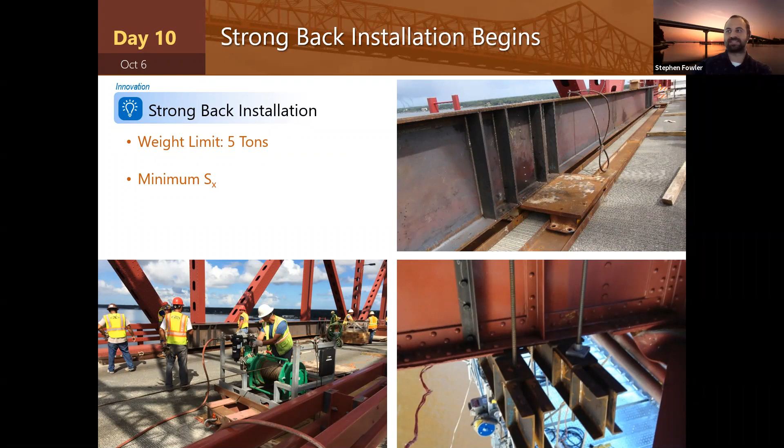One of the first hurdles the contractor had to solve was dealing with huge heavy objects that had to be maneuvered, but you can't put cranes on the bridge because it's damaged. The existing chord, the temporary repairs, the permanent member, these things weigh many tons. Their innovative solution was to rig up the entire bridge with a system of pulleys, cables, and winches, so anytime they needed to move heavy objects, they could pick their winch position and pulleys and drag it along.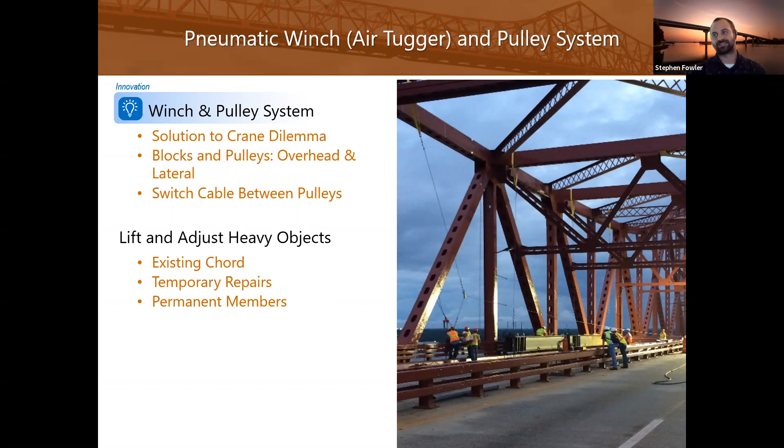You can't really see it in this picture, but you can see all the cables and pulleys. That strong back, as it's being installed, is actually sitting on rollers, so they can pull it and roll it into place. It's pretty cool to watch.

Once we have our suspenders on and we're not afraid of progressive collapse anymore, we need access to the bottom of the bridge. Again, we were very loose with the requirements of the scaffolding system. All we said was that it had to be ultra lightweight, total less than 5 tons, and we gave them certain restrictions on where they could hang and anchor the system to avoid conflicts with the actual repair procedures.

So it was a custom design, built specifically for this project. One of the cool things is that in order to hang it, they used anchors in the deck and also Sky Climber rolling roof rigs. If you're not familiar with those, they're often used on large buildings to hang window washers, moving around on top of the buildings. They actually got some of these from local commercial buildings and used them on this project.

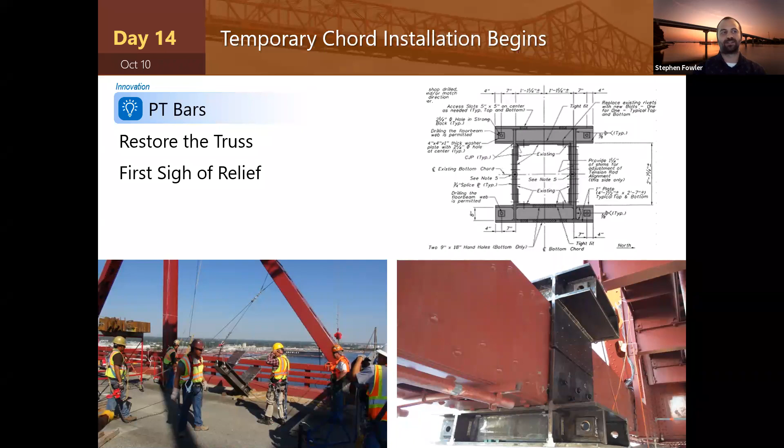Once we've got access, the real work begins. We needed to restore the truss geometry. Basically, the temporary chord installation was there so that once installed quickly, that's our big first sigh of relief, because it means we've established the natural load path for the structure. We're no longer really afraid of it collapsing.

But like everything with this project, nothing comes easy. There were a lot of constraints, particularly geometry, that we had to deal with. The PT bars themselves were 66 feet long, but you can't handle that, so they were spliced into three segments, each weighing about 300 pounds, and it took 3 to 4 people to manipulate. In the upper right picture, you can see we had floor beam webs in the way, so we had to cut holes in them.

You couldn't cut huge holes in them, or else they wouldn't have capacity anymore whenever you actually open the structure up. But the holes had to be very specific in their size, because when we went to pull the geometry of the structure back, we knew those bars were going to move about 4 inches vertically and 2 inches laterally, because that's what we determined the bridge had moved out of plane when this chord was severed. There was also the whole mangled mess that had to be heat straightened. There's scaffolding hanging around in there, and all sorts of other members.

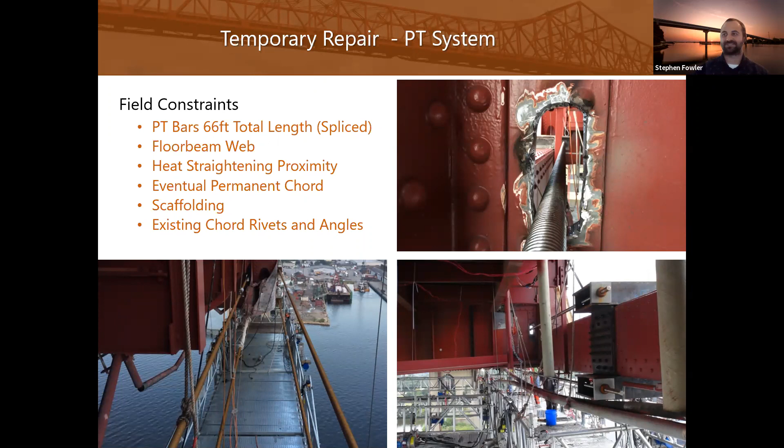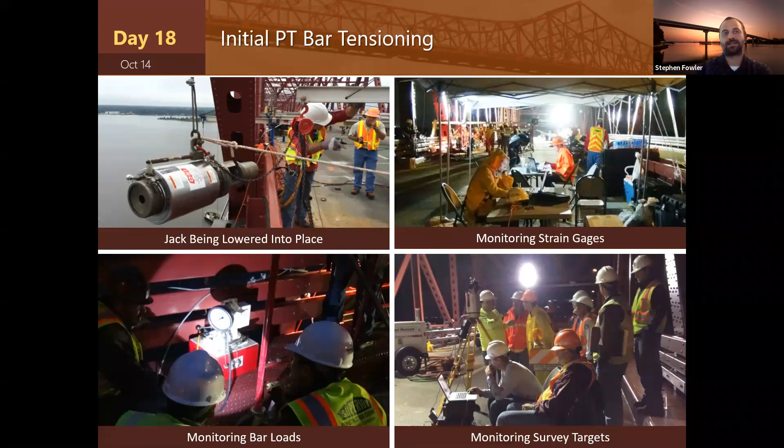So once we got all the bars in, it was a cold, rainy evening when we went to stress the bars. In the top left, you can see one of the jacks being lowered down into place. There was a whole lot of monitoring data that happened that night. There were a bunch of strain gauges installed that we were monitoring in real time. We were monitoring the jack loads, or the bar loads, in real time. And we were also monitoring survey targets in real time. So as these bars were being stressed and the bridge was slowly pulled back into place, we could see it in real time through the constant survey updates.

Talking about survey, a lot of people probably wonder, well, how are you surveying this in real time? We were using a 3D laser scanner and a whole bunch of top-of-deck targets that were set up. They were strategically placed so they could give us data in real time at any increment we wanted.

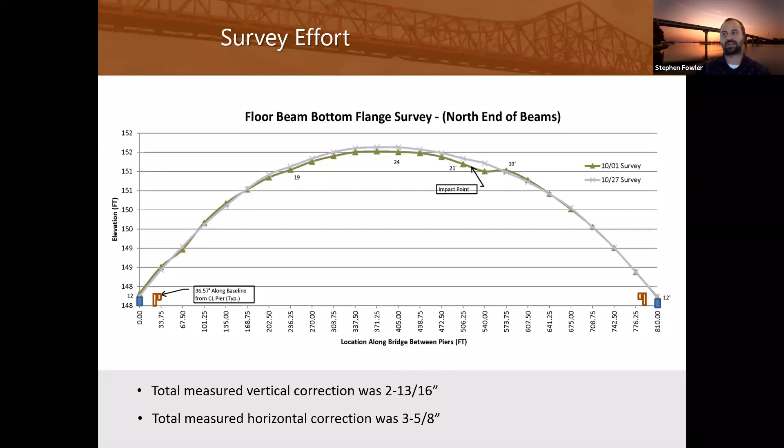So once we got the temporary ties in, we've got the geometry pulled back together, so we think it's in the right spot. Well, now we gotta say, what do we do with this giant mangled mess?

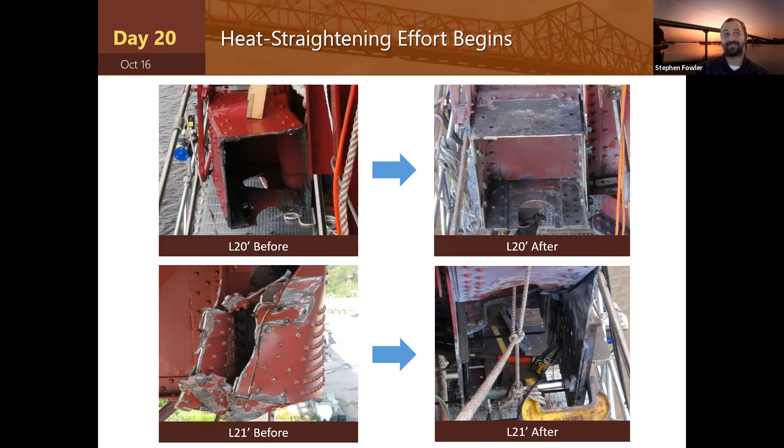So after all those shenanigans, the contractor needed to start installing the actual permanent repairs. One thing they pointed out to us pretty early on was you have this massive member that you're trying to fit into a very tight space that's not quite right because it's been heat straightened. They understood that trying to maneuver this huge member was going to be difficult, so they suggested using a small stubby member to help maneuver this thing into the gusset area, and then splice the remaining portion of the permanent member onto that. We called it a stub beam. This was all constructability, and they'd still be out there today trying to put this in place if that stub beam wasn't there.

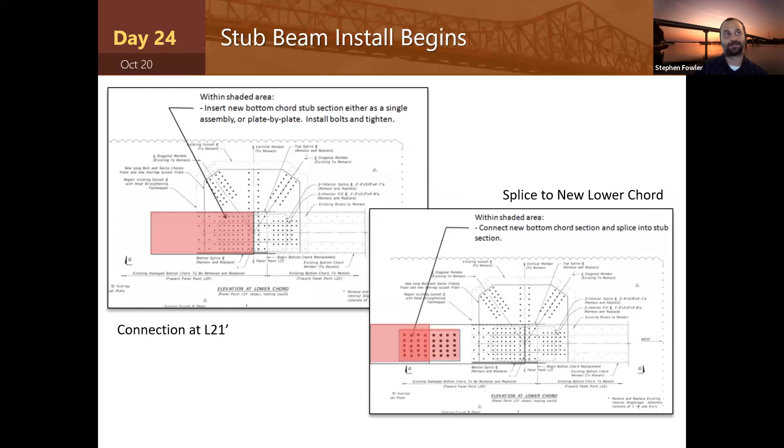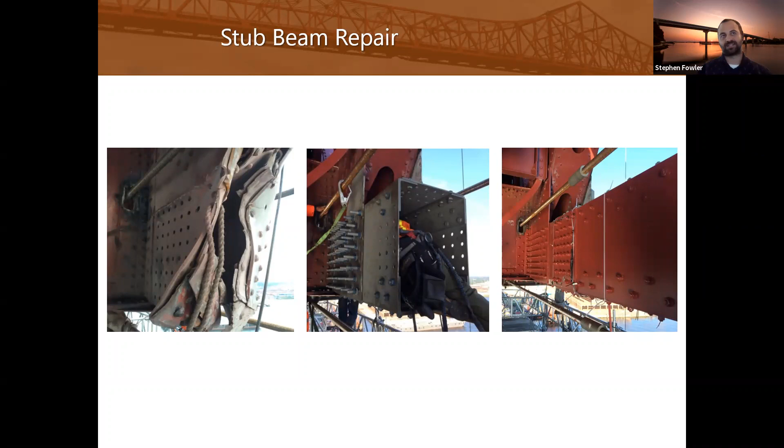It's been painted. You can also see the PT bars are still there from the temporary fix. Here's a couple more pictures. They actually couldn't even install the rest of the main member in one go because it weighed too much—we still had a weight limit on what they could bring out there. So they brought in the bottom and two sides as one piece, and then came back later and put the top portion on, which is why the top is missing on the left picture.

So some people ask, well, you straightened these gussets, but did you strengthen them? And the answer is yes. Nobody wanted to rely on anything that had been damaged for its strength. We weren't smart enough to come up with this idea ourselves, so we called about 25 different DOTs asking if anyone had ever seen something like this. No one had, but Ohio DOT had developed a very unique way to strengthen gusset plates.

What it involved is taking every single rivet out one at a time and replacing it with an extra long bolt. Once the whole thing is bolts, which you can see in the upper left corner, you come in and put a fill plate—we call it a Swiss cheese plate, since it looks like a slice of Swiss cheese, to get over those nuts. Then you come and put the new gusset plate on top of that, and put the remaining nuts on. So it's pretty cool.

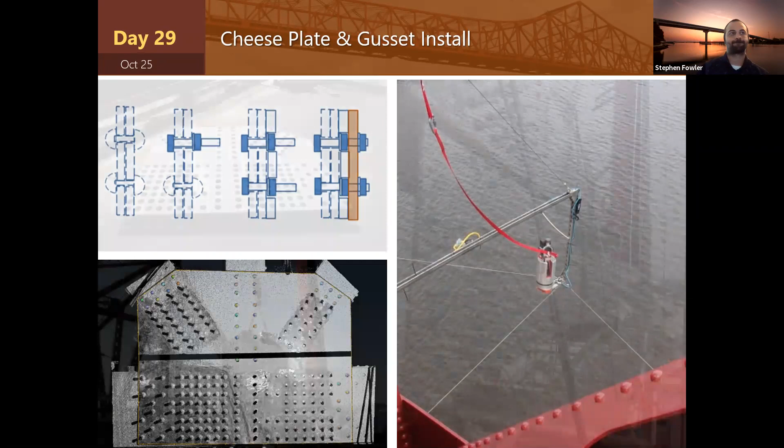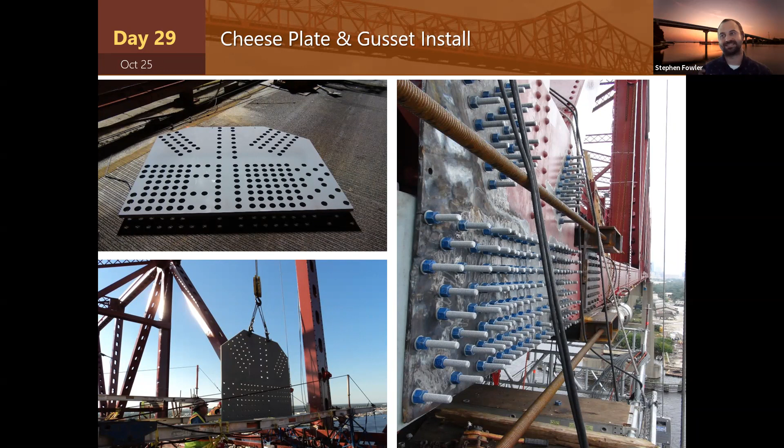Here's a couple pictures of the installation. The top left is the Swiss cheese plate. The bottom left, I believe, is the actual gusset plate. The picture on the right shows you just how tight of an area they were working with. You can see most of the rivets have been replaced with bolts by now, and you can tell how close that PT bar is to those bolts. They have to try to fit these plates in that little gap and then get them over the bolts.

So once everything's been strengthened, we had to test it again. They called back the interns, loaded up the flatbed trucks, and had them drive back over the bridge. This is a picture of the team that was there that morning doing the load testing. This was basically the final thing that needed buy-off before it could be opened, but it hadn't been painted yet—they were going to open the bridge up, but still take time to paint it afterward.

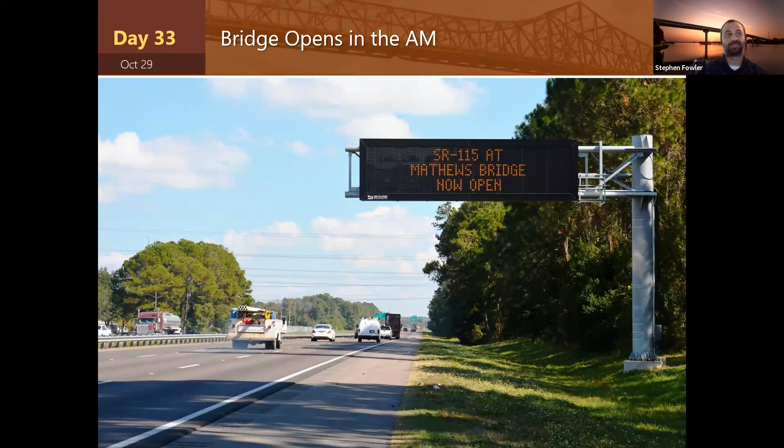And the very next morning, without any fanfare, they opened the bridge to traffic. All they did was remove the barricades and put up on one of these DMS signs that it's now open, and traffic just started using it like normal. It was very surreal that morning.

So one question we get in every presentation is, what if? Everyone wants to know, what if the structure had been impacted in a different spot? I can tell you from our experience, where it hit, everyone thought it should have collapsed. The structure had a lot of additional redundancy that trusses don't typically have. But what we can tell you is the spot where it hit had the least amount of force of any place of a main member on the entire structure.

If you were to look 30 feet to the left of the point of impact, the force in that exact same member is about 50% higher. If you were to go about 30 feet to the right, it's over 3 times higher. So though we can't say for sure what would have happened if the ship had impacted in another location, we're all pretty sure that if it had hit 30 feet in one direction or the other, it is much more likely that the structure couldn't have survived.

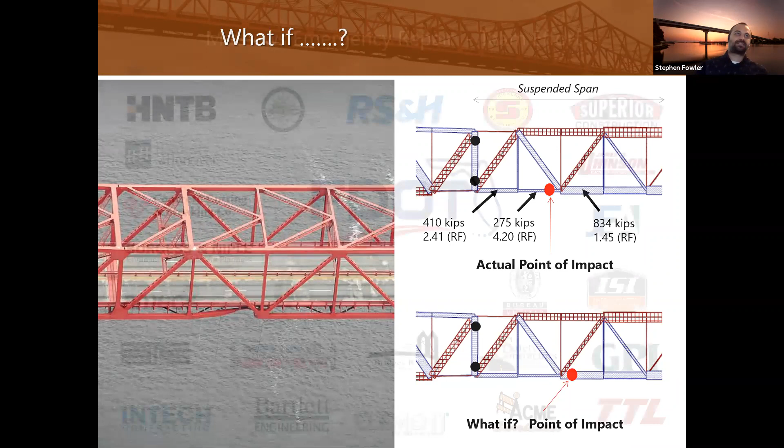This picture right here is actually my favorite picture of the whole slideshow. It was mentioned in the video, but really this couldn't have happened without teamwork, without every partner playing their role and being selfless and willing to do whatever it took to get this project done. This is the logo of all of the companies and agencies that were involved. There were over 200 members involved in construction, but when you include the design team and the inspection team, at the end of the day, there were over 400 individuals involved in this repair.

And with that, I guess we can open it up to questions.

Great, thanks guys. A couple of questions. One, Kevin wanted to know, did Florida DOT get reimbursed by the shipping company? Having all those individuals working to do this emergency repair was not a cheap repair. Steve, you want to cover that?

Yeah, interesting enough, the shipping company that was transporting the ship actually didn't do anything wrong. They were found to have not made any errors in what they had done. The ship they were transporting was a Navy vessel, and come to find out that Navy vessel was 5 feet taller than what it was listed at in the plans provided to the shipping firm. I'm not actually privy to the information, but basically FDOT is an agency that cannot be sued, the Navy is an agency that cannot be sued, and then there's the U.S. Coast Guard, which approves these types of shipping patterns - they're an agency which cannot be sued either. I know that the final price tag out the door of the repairs came out to around $4.5 million. I know there was a lot of discussion about who should pay for it, but I do not know who actually wound up with the bill.